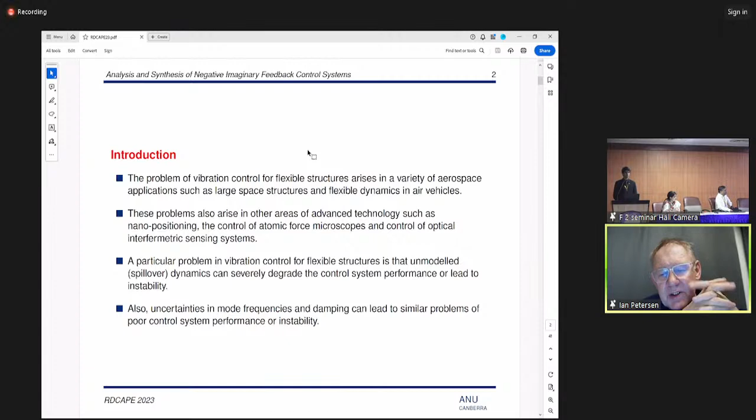This is an area of research I've been doing for quite a long time, and the motivation for it is the vibration control in flexible structures, such as might arise in a variety of aerospace applications, such as large space structures, flexible dynamics in air vehicles, also in nanotechnology applications, such as in nanopositioning, control of atomic force microscopes, and control of optical interferometric sensing systems.

So the particular problem that occurs in such vibration control problems for flexible structures is that there may be unmodeled dynamics, which are often called spillover dynamics, which may severely degrade the control system performance or even lead to instability. Also, there may be significant uncertainties in things like the mode frequencies and damping that can also lead to similar problems in control system performance.

So here's one of the motivating examples, the atomic force microscope, which operates at a microscale and has a flexible structure consisting of a cantilever as well as a piezoelectric tube actuator, which does the actuation and sensing in this device.

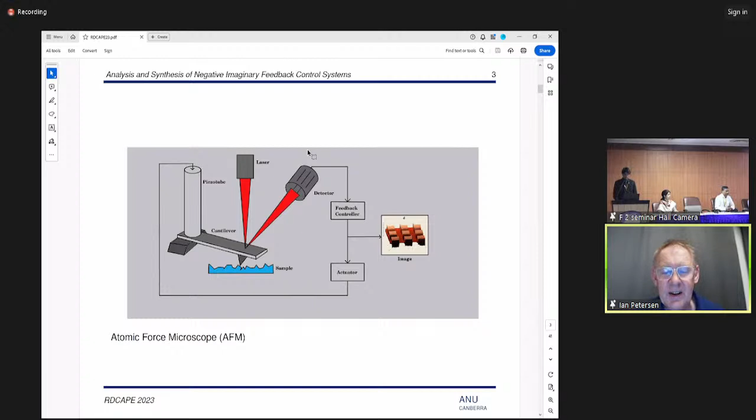So the idea of this negative imaginary systems theory is that it aims to provide a general systems theory framework for robust control of such flexible structures. It allows for the design of controllers to increase the damping of the modes of a flexible structure. The controllers are also robust against uncertainty in modal frequencies as well as unmodeled spillover dynamics. Also, it is useful in control of flexible structures involving the use of piezoelectric actuators and sensors.

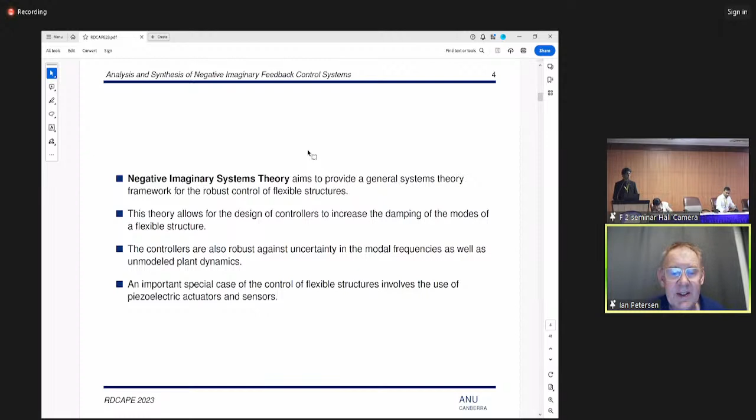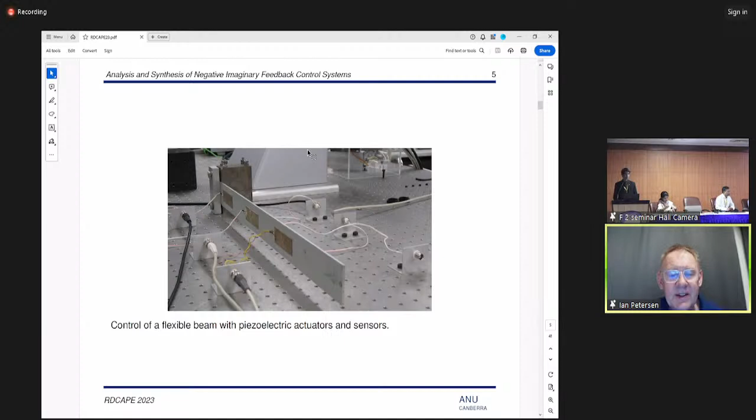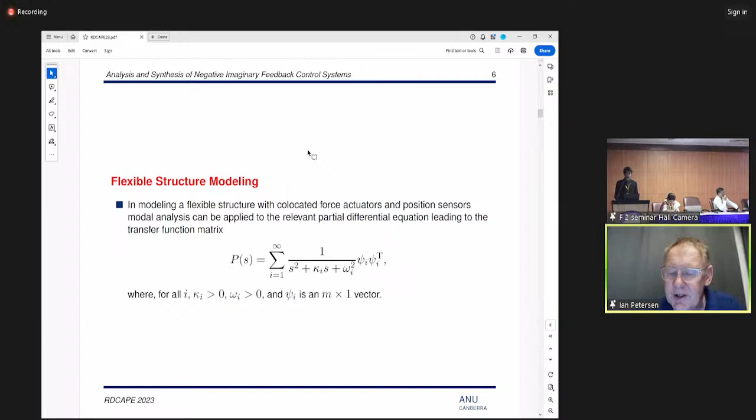If we take the Hermitian imaginary part of such a transfer function matrix, we get a quantity that is negative semi-definite for all frequencies. In the scalar case, with a single input, single output flexible structure, that just means the imaginary part is negative over all frequencies. Because of that, we call such a transfer function negative imaginary. It turns out that any flexible structure with co-located force actuators and position sensors will have this negative imaginary property for its transfer function matrix.

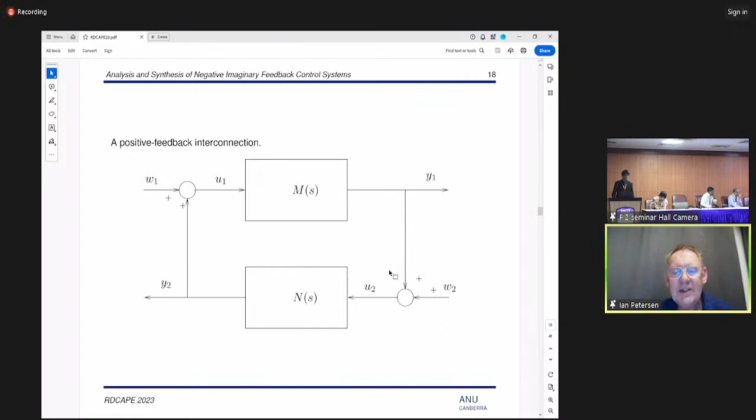So the proof of that theorem, the negative imaginary theorem, involves using that negative imaginary lemma to construct a Lyapunov function for the closed-loop system. We won't go into the details of that here, but instead we'll look at how we could have a simple proof in the single input, single output case based on the Nyquist criterion.

This gives us a simple interpretation about why this theorem holds. Because we're using positive feedback, when we use the Nyquist criterion, the critical point that we look at is the point 1 plus j0. We know that negative imaginary systems have a phase lag between 0 and 180 degrees, and an SNI system will have a phase lag which is strictly in that interval. That means that when we form the cascade of the NI system and the SNI system, the corresponding loop gain transfer function will have a phase lag which is in the strict interval between 0 and 360 degrees. So what that means is the Nyquist plot excludes the positive real axis for positive frequencies.

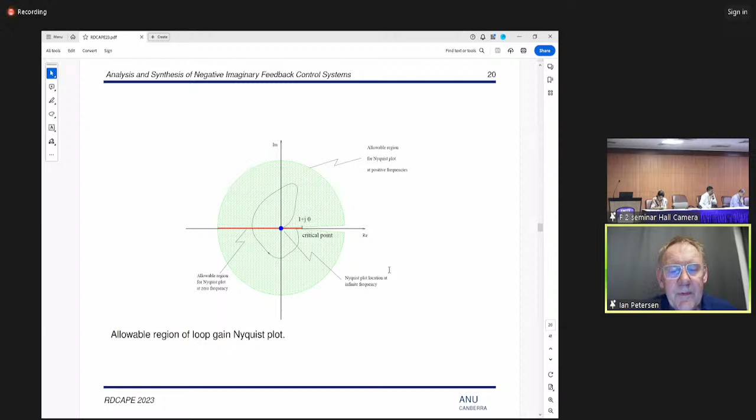So formally, this result generalizes to the multi-input, multi-output case, when we've got an NI transfer function matrix and an SNI transfer function matrix. We've got this assumption that at infinite frequency, the loop gain is 0, and then the result is that the positive feedback interconnection we've been looking at will be stable if and only if the maximum eigenvalue - because now this is a matrix - of the loop gain at 0 frequency is strictly less than 1. In the general case, the proof uses the negative imaginary lemma, and in the special case, the single input, single output case, those Nyquist arguments I just gave give you the result.

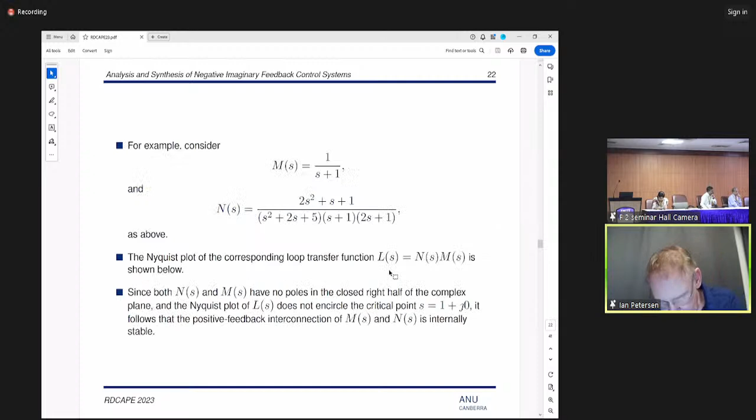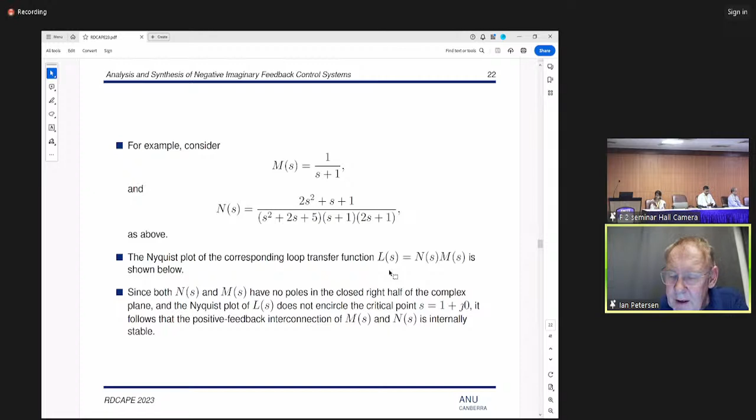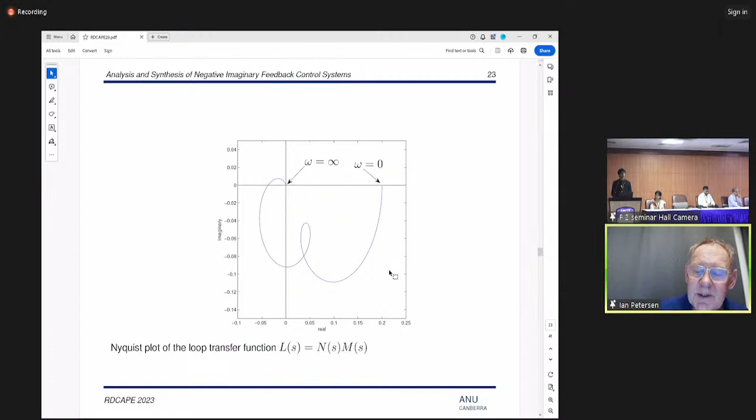So let's look at an example of this. Suppose we've got the same transfer function as before as N of S, and we've got M of S as just a first order lag, and we look at the Nyquist plot of the corresponding loop gain transfer function, the product of these two transfer functions. We can see that now the only time the phase is 0 is at 0 frequency and infinite frequency, and also the DC gain is strictly less than 1, so we guarantee closed loop stability.

What I want to move on to now is looking at some ideas about how we might synthesize controllers using this negative imaginary systems theory. The idea we'll look at is to construct a state feedback controller in order to try and make a system negative imaginary. The first approach we'll look at is an LMI approach.

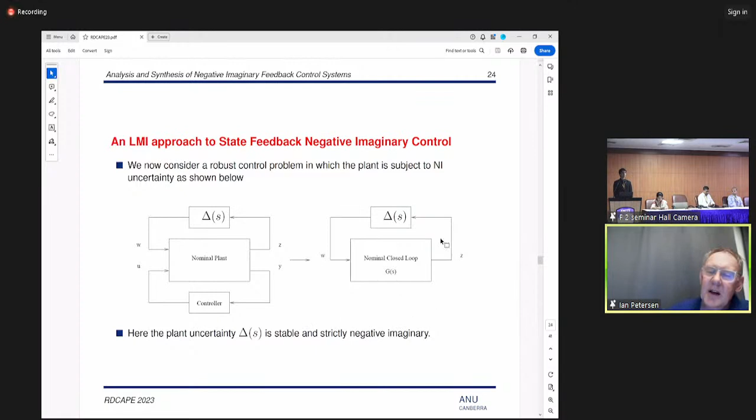So the idea is that we might have some nominal plant which is not negative imaginary. It's connected to some uncertainty delta of S, which is negative imaginary, representing, say, the transfer function of a flexible structure. Then we want to apply state feedback to that nominal plant in order to make the nominal closed loop transfer function negative imaginary, and then provided the uncertainty is stable and strictly negative imaginary, we can guarantee closed loop stability.

So here we're assuming we've got full state feedback, and that enables us to get a quite straightforward solution using LMIs. If we don't have full state feedback, if we have output feedback, it is possible to solve this problem, but things become more complicated, so we won't go into that.

Okay, so this is our nominal plant. It's got an uncertainty input, uncertainty delta enters in this channel corresponding to matrix B1. We've got our control enters into the system via the matrix B2, and the input to the uncertainty comes from this output Z1.

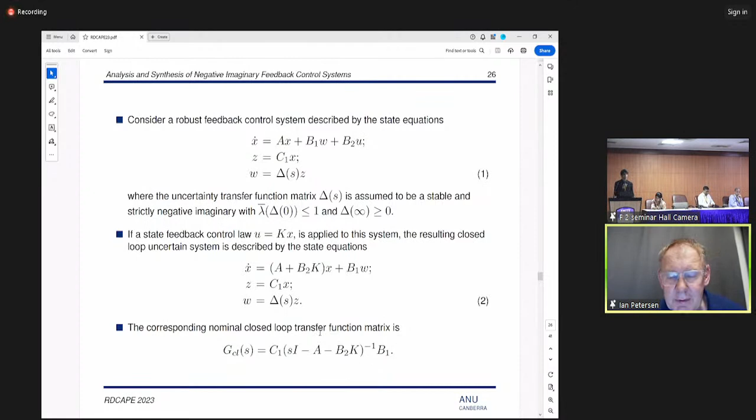So the idea is we want to find a state feedback control, U equals Kx, to try and make the closed loop system negative imaginary. So we've got this corresponding closed loop transfer function. We want that to be negative imaginary.

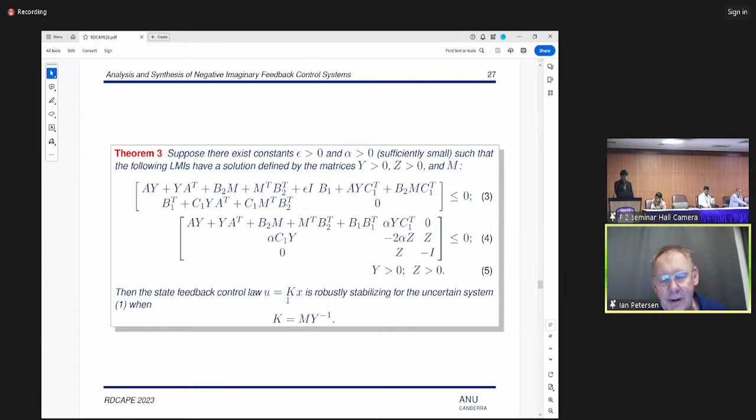And in this LMI solution, we get a sufficient condition in terms of these LMIs and the corresponding solutions. If we can find parameters epsilon and alpha sufficiently small such that these LMIs have a solution, then from those solutions we can construct the corresponding controller which robustly stabilizes our uncertain system.

So to illustrate this, let's look at an example. Here's our nominal system. It's made up of various components. They might correspond to, say, actuators and sensor electronics, which we have some model for. But included in this is a flexible structure, which we haven't got an exact model for, but we know has co-located force actuators and position sensors, and so therefore would be negative imaginary, or strictly negative imaginary.

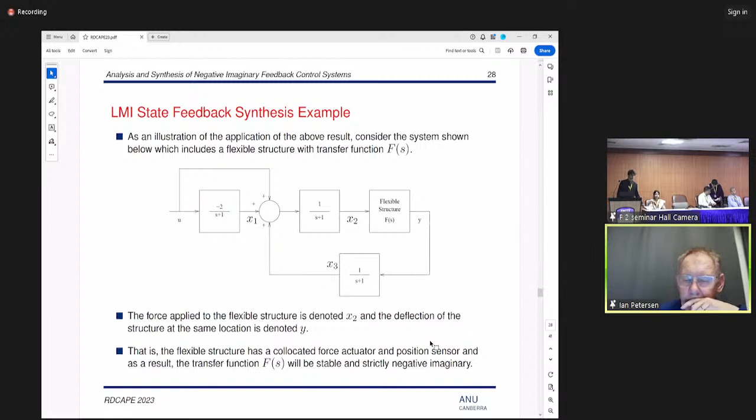So the force applied to the structure is labelled X2, and the deflection of the structure is labelled Y. So we want to construct a state feedback controller, as we said before, and we'll replace the transfer function f of s by a constant gain of 1, and this uncertain transfer function delta of s, which will also be

strictly negative imaginary. So essentially what we're assuming here is we're looking at the case when the flexible structure is not flexible, it just has a gain of 1, and then all of the flexibility is assumed to be uncertainty and incorporated in the transfer function delta of s.

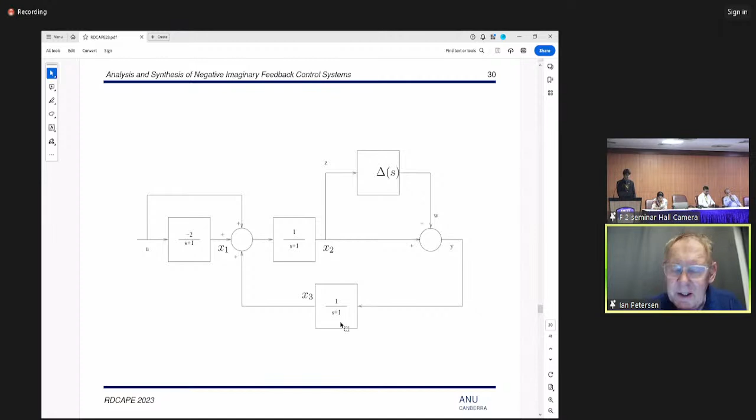So rewriting our block diagram, we'd have the following situation, and then we want to apply state feedback to the nominal system here to guarantee robust stability in the face of this flexible uncertainty.

So the first thing we do is a state space model of the nominal system, which we get like this, and then we've got the A, B1, B2, and C matrices in our standard approach. We have to choose some parameters as small values. We'll just choose those in this way.

Then we apply the MATLAB LMI toolbox to solve the corresponding LMIs, and then we sub that in to find the corresponding state feedback controller, and then according to the theory, that closed loop transfer function should be

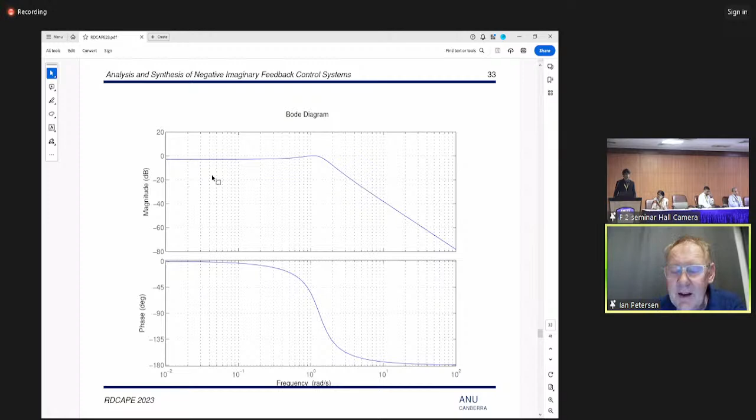negative imaginary. So we can verify that again by doing a Bode plot of that closed loop transfer function, and what we see is that the phase of the Bode plot is between 0 and -180 degrees. So we've got the negative imaginary property, and also notice the DC gain is a bit less than 0 dB, and so that's also going to enable us to guarantee the DC gain property.

So we've got that phase property, DC gain is less than unity, so provided our uncertainty transfer function also has a DC gain strictly less than 1, then the negative imaginary theorem will enable us to guarantee robust stability.

So I'll just finish up with another method of solving the same problem. And this method uses, again, we're solving the state feedback NI problem, but this time, rather than using an LMI, we're going to use a method which involves solving Lyapunov equations, which might be quite a bit easier numerically than the LMI method. So we've got a similar setup with a nominal system.

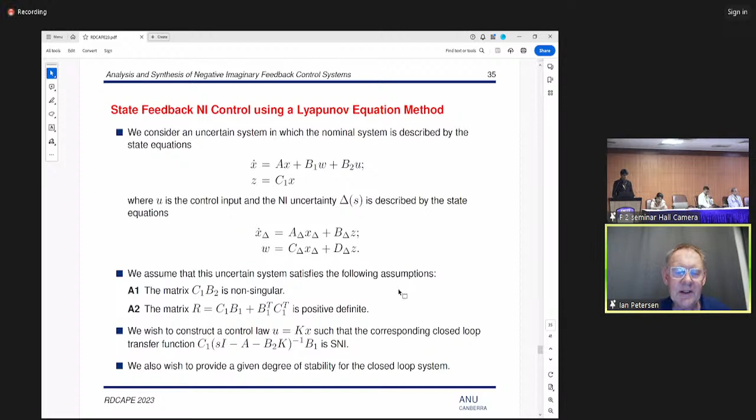We've got some uncertainty. So one drawback of this method is that we need the nominal system to satisfy some extra assumptions so that we can solve it in terms of this Lyapunov equation method. And these assumptions essentially amount to a requirement that the nominal system is relative degree 1. So normally negative imaginary systems can be relative degree 1 or relative degree 2, but in this method we're only allowing relative degree 1.

An advantage of this method, apart from the numerical advantage, is that we can not only stabilize the system but also give a guaranteed degree of nominal stability for the closed-loop system. So the idea is we first specify a parameter epsilon, which specifies how much nominal stability we want, where the poles of the nominal system are going to be, and how much we damp our resonant modes.

Then we apply a Schur decomposition to this transfer function, which gives us a decomposition like this. This essentially decomposes the zeros of our system into unstable and stable zeros, and we only worry about the unstable zeros. We also do a corresponding transformation to the rest of the system. The result is that we solve a pair of Lyapunov equations which only relate to these unstable systems, so the subsystem corresponds to the unstable zeros.

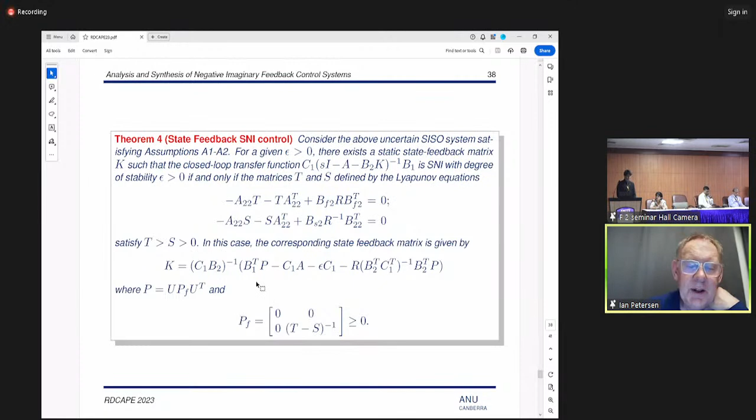We solve these two Lyapunov equations, and provided the difference between the solutions, t minus s, is strictly greater than zero, positive, we can solve the corresponding problem. This is the formula we have for the state feedback gain matrix, and it turns out that this matrix PF is going to be the matrix that occurs in the negative imaginary lemma.

So this method is actually a necessary and sufficient condition, provided we satisfy the initial assumptions. It also allows for a degree of stability to be specified. It has the advantage, but also the disadvantage, that we require these extra assumptions, which restrict us to relative degree 1 systems.

Okay, so that's all that I want to say today.

In conclusion, we've considered a class of systems termed negative imaginary, or NI, systems. We've shown that the consideration of these systems leads us to some robust stability analysis results about the feedback interconnection between NI systems and strictly NI systems relating to the DC loop gain. We've shown that this can provide analysis of robust stability of lightly damped flexible structures.

And it also captures some of the early, more practical approaches that were used by engineers in the 80s in solving these problems. It's quite similar and complementary to the passivity approaches.

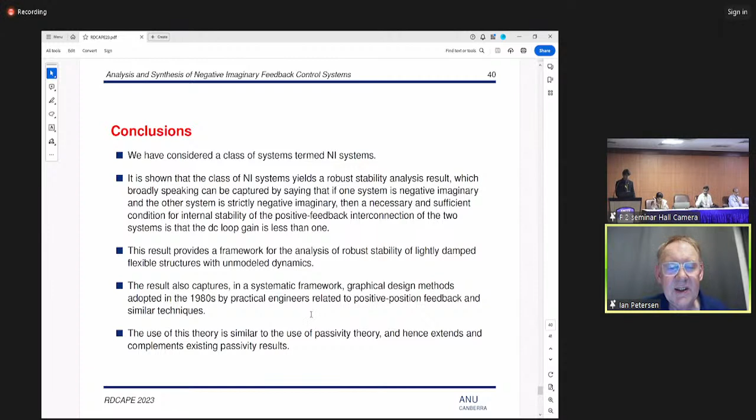We've also considered the state feedback synthesis results, which, if we've got state feedback, enable us to systematically design controllers that can exploit this theorem. We've got two methods: the LMI method, which is very general but only a sufficient condition, and may involve difficult LMIs to solve for high order models. The second method involves Lyapunov equations, which may be easier to solve, but it requires this assumption that restricts to relative degree 1 systems.

Okay, so I think that's all that I've got to say. I'll stop there and ask if there are any questions.

Okay, so thank you, Dr. Petersen, for your very informative talk. I'm Dr. Tiwari, with whom you were in contact over the last one and a half months, from India, right? So it was. Yes, nice to talk to you.

Yes, so this was a very informative talk, and one of the questions that comes to my mind is that there is a requirement of a perfectly square matrix for applying this negative imaginary feedback system.

Is it compulsory that if we don't have a perfectly square matrix, then can we not go for this application? I guess the original motivation came from the fact that we have the requirement of co-located sensors and actuators, so you might think, well, if we have more sensors than what we need for co-located sensors and actuators, maybe it should still work. I think some researchers have been looking at this. If you've got more sensors, maybe you can apply some kind of scaling of those sensor outputs to reduce the number of measurements to equal the number of actuators, in such a way that you guarantee the negative imaginary property. So that's one way people have looked at doing it: if you have more sensors, you'd think that would be a good thing, and then you work out how to combine those sensor outputs in such a way to make the overall system square and negative imaginary.

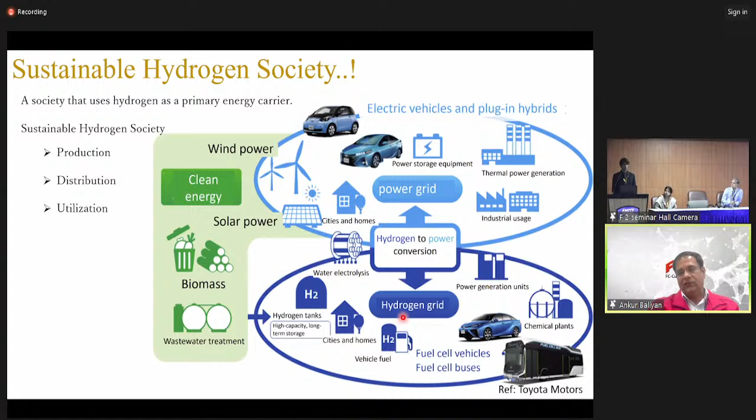So we generate clean energy, transport that hydrogen, and hydrogen can be used in various ways. Of course you can power your car, buses, and transportation. But you can also transfer that hydrogen to the power grid, and the hydrogen and EV combination is starting to dominate.

That means almost 60% is not from passenger cars, but from light vehicles such as small pickup trucks or heavy duty trucks. So 50% of passenger cars may possibly be converted to electric vehicles, but 60% of the market in the future is likely to be dominated by fuel cells.

Coming to the global commercial vehicle market, many hypes are out there, but almost 80% of this market is still powered by diesel engines. If you look at the fuel type, many people believe there have been radical changes toward EVs, but only about 3-5% of present vehicles are EVs. So we still have a long way to go before we reach a sustainable society.

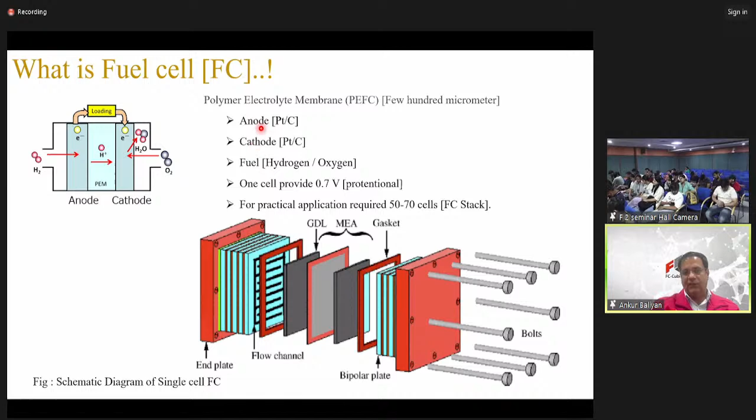As I told you, since the anode has nothing much, of course you can improve it, but you can see the weightage in terms of cathode and anode here, the reaction pathways, this is the most important. Many things are happening in the cathode, so people would like to explore cathode rather than invest more time in anode. Of course, one can investigate and spend their time on anodes as well.

Looking at the key research areas, one is the catalyst. We would like to do catalyst development, which is particularly for the cathode only. People are looking at innovative fuel cell design - can you improve this fuel cell so the weight reduces and it gives more energy density? People are also looking at the membrane electrode assembly, which I'll explain in the next slide. So these three are the main key areas that people are focusing on.

A good thing about the fuel cell is that since platinum is the only catalyst we are using, the geopolitical significance is it doesn't have much exposure to country-specific restrictions, unlike EVs. If you look at EVs, lithium reserves are mainly controlled by China, or cobalt reserves and so forth. So I don't know how far EVs can be sustainable if this geopolitical scenario continues.

What is essential for the fuel cell is we need to find out, because many reactions are happening, we wanted to explore the reaction pathways. I would take some time to explain this system, which is essential.

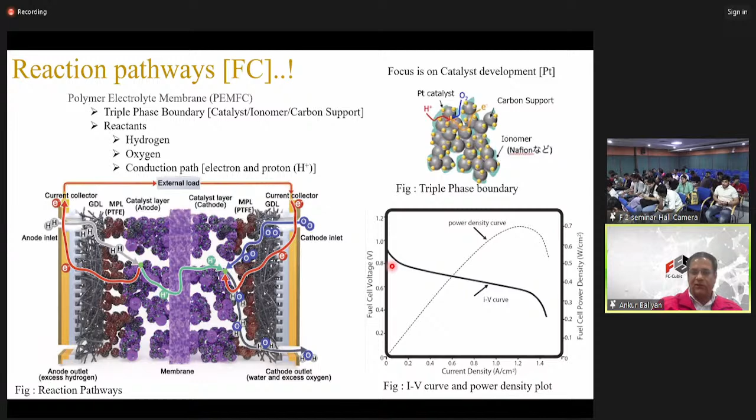How possible is it for us to have this slope not like this, but like if it became something like this. So if it became extremely flat, that means instead of 0.7 average, it's going to be around 0.8, which will almost increase the power density by twice in the same space of fuel cell.

So many people, since I already said the catalyst is the most essential part of the fuel cell system, many people are working on this to understand how the catalytic mechanism takes place. So to understand the catalytic mechanism, we need instrumentation or characterization.

So one is called unimodal characterization. Unimodal characterization means you do one kind of characterization, and you try to come up with some hypothesis that okay, this is what is happening. But very recently, people are doing the multimodal approach, where you have multiple instruments, and the knowledge coming from all those instruments gives some meaningful, much better approximation than the unimodal. So that's called multimodal or integrated analysis.

Since you already saw the fuel cell, the active component in fuel cell, you have the catalyst, and catalyst is made of atoms, and atoms are again arranged in unit cells. In terms of material, it has proton, and of course it has the electron, or its distribution.

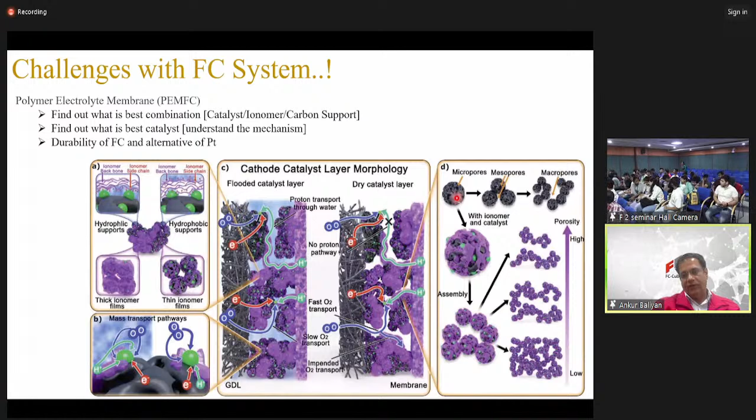And since this catalyst is basically in close proximity to this carbon support, we need to think of this also. So this can be a few micrometers, a few tens of micrometers, basically.

So the interaction length goes from atomic to micro level, or sometimes to meso scale. That means a single modal approach is not enough. We should include a very good picture, and we have to have this whole regime included into our characterization.

So essentially, remember this: what kind of characterization do we need? We need characterization which can tell us the particle sizes, and of course their interaction scale and various kinds of properties. So we need to investigate this kind of sample with some characterizations. I'll skip this for the moment, but I think it's good to go.

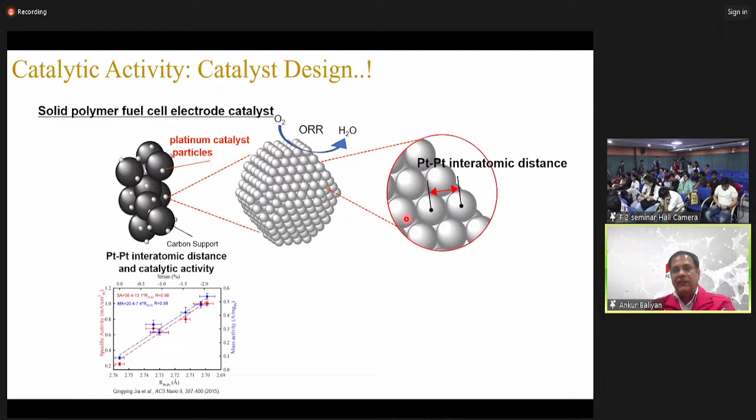That means we need to find a way so that we can know the interatomic distances and the crystal structure. At the same time, we need something to tell us the particle size, and of course how the alloy influences its surroundings.

To do so, most people use instruments in their lab, but frankly speaking, those instruments are like a toy, because the energy they generate is not enough to probe individual atoms or individual crystals. So you can use them for screening purposes, but if you really want to understand some mechanism meaningfully, you have to use some kind of synchrotron radiation.

For those who do not know about synchrotron centers: it's like a very large ring of an accelerator. Here, we launch an electron, and using magnets we accelerate the electron so that its speed gradually approaches the speed of light. Once that electron beam passes through the magnets, which we call undulators, the electron starts to radiate energy.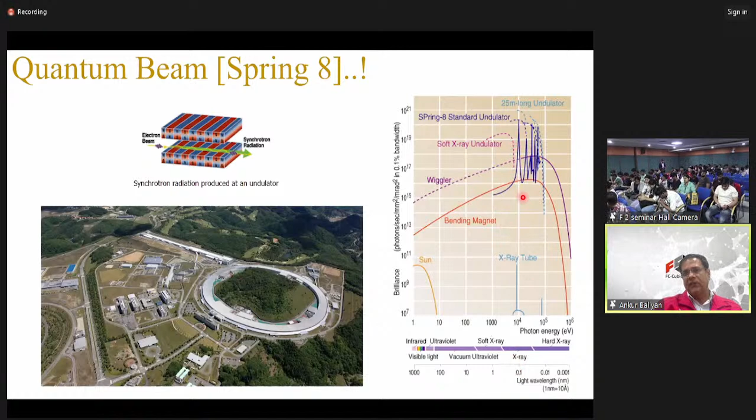And that energy, you can see on your right hand side, is X-ray. You can generate soft X-ray, or you can generate hard X-ray, and so forth. The energy of those is really intense, in terms of the brilliance, if you measure it.

In Japan, we have various synchrotron centers, but a very famous one is SPring-8, with whom we are working at the moment. You can see there are almost 40 beamlines. A beamline is like one kind of characterization that you can do - you can do diffraction characterization, spectroscopic characterization, or imaging characterization, depending on which beamline you use.

So to understand something in terms of mechanism and to see the reaction pathways, we have to have cutting edge characterization or instrumentation. We call it integrated analysis. This is where the scope for students probably is, because this kind of instrumentation does not exist, and sometimes you need to modify it, you need to redesign it. There are very highly paid professionals who do that.

In quantum beam analysis, we do 2 different kinds of characterization: one is called spectroscopic, and another is imaging characterization. Here I'll be talking about 6 different kinds of characterization - 5 primarily. So we have the XRD, which is to know basically the crystal structure.

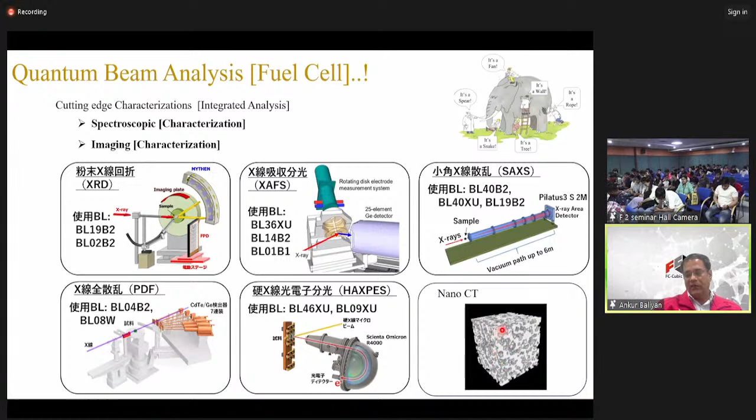kind of crystal or any kind of systematic arrangement we have. And this is HAXPES, which is basically to know the valence band probing, or the kinetic or binding energy probe. And of course in terms of imaging, we have the nano-CT, where you can scale, you can slice basically the electrode, and then you can see the distribution of water, or the distribution of catalyst, or the carbon or ionomer and so forth.

So I summarize everything here. We have different options, but this is primarily for the lattice constants, of course. Other information has been given below, but because of the time constraint, you can see that we can probe basically the lattice constant with XRD.

And we have the XAFS. We can probe basically the alloying degree, that means we can probe the local structure. And this PDF basically is a counterpart of XAFS, because this can only probe up to 5 nanometer, but this can probe beyond 5 nanometer, like 10 nanometer or 20 nanometers. So that means it can locally analyze, but it can really do much more at the tens of nanometer scale.

Then you have the SOCs, which is for the self-assembly kind of structure, we can probe the particle size as well. And then we have this HAXPES to probe basically the electronic state, like the band gap and stuff, if they're contributing, because the D band here contributes a lot in terms of the particle catalyzing activities.

Of course, we should also talk about the imaging. There are different kinds of imaging you can do. You can do STEM imaging using the TEM, or you can have the SEM also to know the 3D structure. But here at the moment, we are looking at the STEM images.

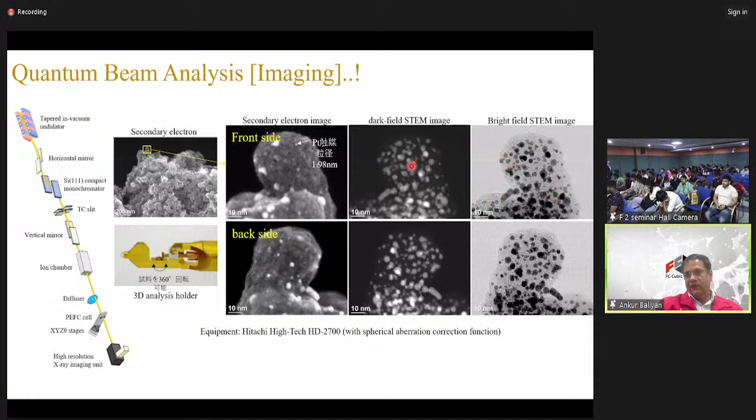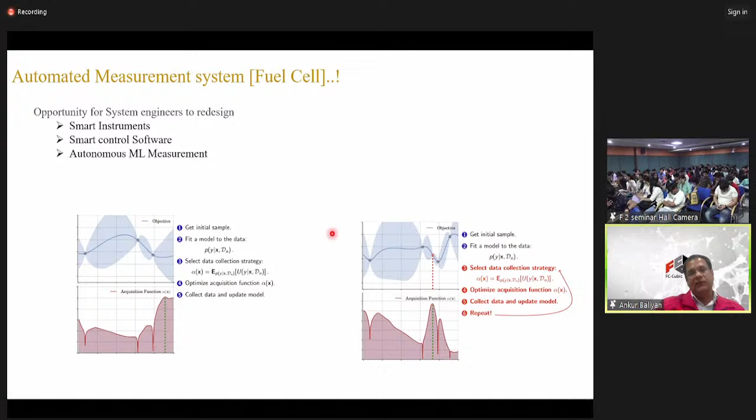And that says, this is the highest point, my confidence at this particular point is low. If you measure at this point, my confidence will improve. This curve slowly - meaning the black box - starts to take the shape of the objective function, and so forth. This is called an autonomous measurement system. This is the future, where people are working.

Since we have the measurement system, we also need an analytical system. So you have to have a database, because we're not going to do unimodal analysis - we're going to do multimodal analysis. At the same time, as this data comes in, you need domain knowledge experts - people who are good in, let's say, fuel cells. They will create a dictionary, and based on the dictionary and the data, we design an application so that analysis can happen autonomously. After the analysis, the report can be shared, or the model made during machine learning can be shared with colleagues, so efforts can be minimized.

So what we are doing at the moment is called integrated analysis. You have the energy source - earlier this instrument was on a different beamline, but now we are making a new beamline where all this characterization related to the fuel cell can happen simultaneously. That means you don't need to move the sample.

Earlier when you measure, the sample position is the same, but when you measure from another beamline, the sample position shifted. So the sample is the same, but you have missed the position. The spatial information is lost.

However, with integrated analysis, you need a system engineer to design all this together because it's technically challenging. So from the data you collect, you put the dataset together and send it to the machine learning model, you train a model, and for that you need a workstation with GPUs computationally enough to take lots of data. Then you can visualize that data or share the model on the cloud for further analysis, to autonomously analyze it.

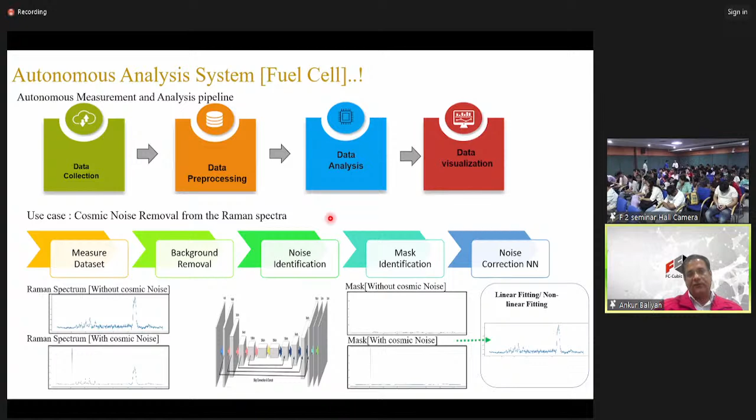But at the moment, we are measuring the data and simultaneously correcting it, doing the background and noise correction in real time. Maybe if you have even 1 million spectra, it will hardly take 2-3 minutes to remove that noise. So this is the kind of use case I wanted to introduce.

So I come to the conclusion: development of the next generation fuel cell ecosystem requires the following things. One, you need to find the bottleneck in the system - the bottleneck of each individual system - and fix that, meaning digitize that system. Focus on high throughput experimentation.

Then we need to design and develop cutting edge instruments and AI-enabled data acquisition techniques. Of course, autonomous characterization and AI-powered measurement analysis. And it requires capital investment for human resources, computing infrastructure, advanced instrumentation, and AI.

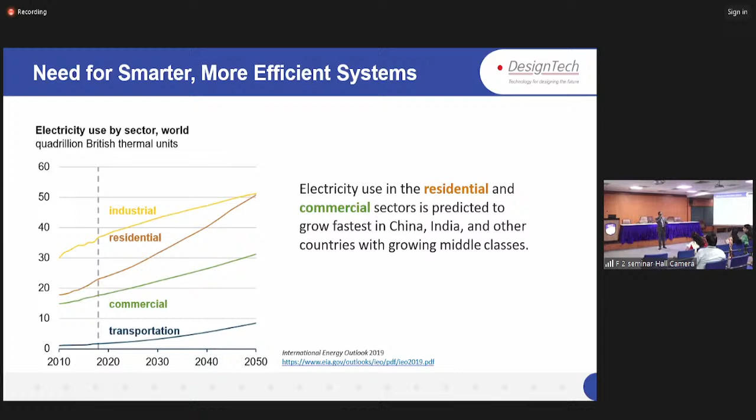Now, next we are going to talk about what challenges industry is facing. When we say electrification, these are the key technologies which are currently in use: first is battery, power electronics, and motor control. We have discussed this earlier also, that these things are available everywhere, and everything will be controlled by these things.

Now, these are the key technologies, but what are the challenges?

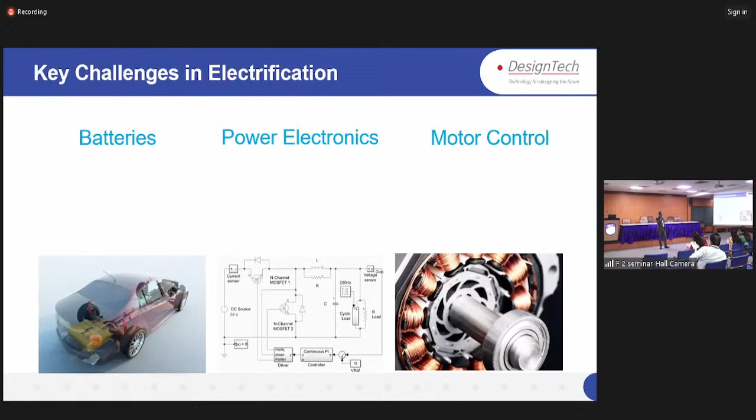When we say challenges, things like battery modeling or safe operation, whether the battery is working safe or not, and aging of the battery. We all use smartphones, and our smartphones' battery life degrades day to day. So we need to work on that too, to get some kind of optimized solution so it can work more efficiently.

For that, what we require is BMS system development, battery management system.

Next, for power electronics, we definitely require some kind of dynamic solution. A digital control needs to be designed, a supervisory logic needs to be designed, and when working on this, we need rapid prototyping. So whatever we have developed on a motor or a system, we need to prototype it on an ECU so that it can control that motor itself.

In motor control, we definitely require sensor calibration, parameter estimation, efficient algorithms, and control tuning. The last two are the most usable things in motor control: parameter estimation, meaning what parameters we set for a motor so it can work efficiently, and how we auto-tune the controller we are designing. These are the major challenges industry is facing.

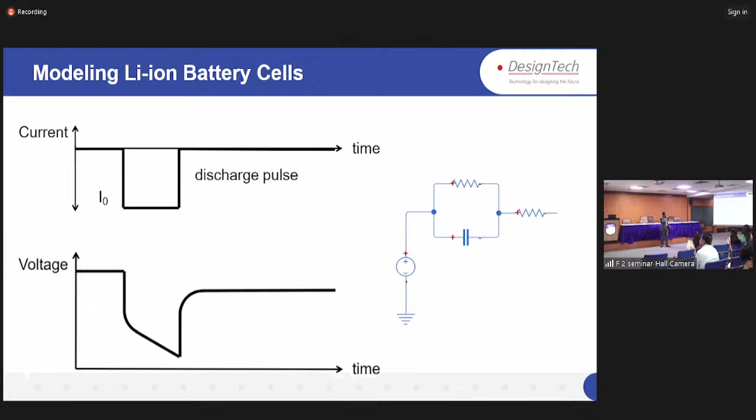When we say we are going to model lithium ion battery cells, the first thing that comes up is how it is going to charge and discharge. A typical current and voltage graph of a lithium ion battery is displayed here, showing how your electronic circuitry will be displayed, whether building on hardware or software. When we say how it is charging and discharging, it has a series resistance which works on the instantaneous response, then a parallel resistance and capacitance which works for exponential relaxation, and in the end a voltage power source is required which works for open circuit potentials.

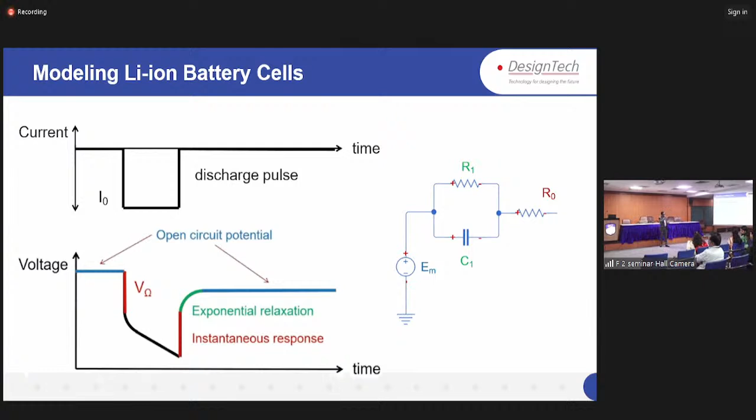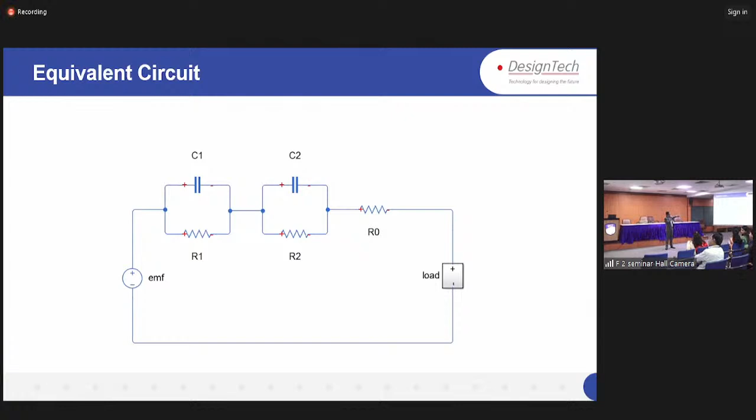So how are we going to use MATLAB for this? This is my circuitry. It looks like this - we have used some resistance, capacitance, a load, and a power source. So how do we build this in Simulink?

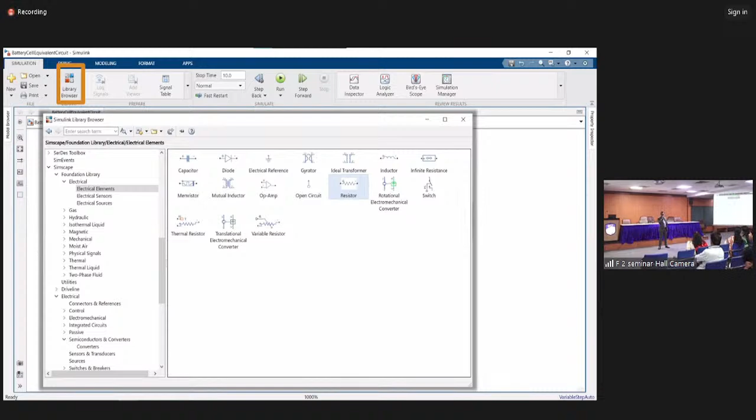Simulink is a platform for model-based design environment where we have a proper library available for different components. You can use these components, which could be electronic components, active or passive, or single phase or three phase components available for electrical modeling. By using these kinds of libraries, we can build up such kind of model.

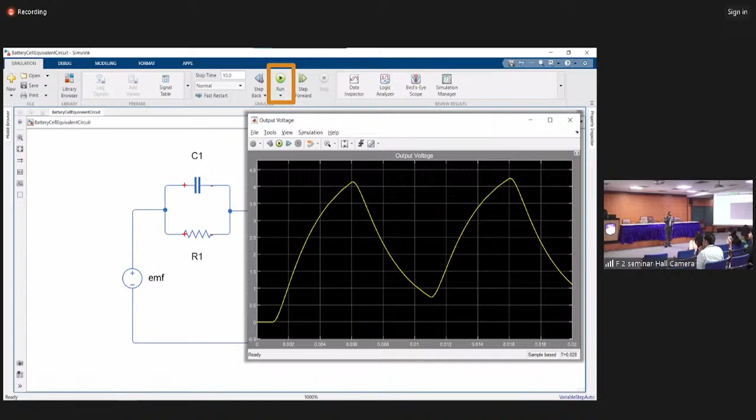So when we build up those things, what we could do is simply run the model and see what kind of responses are coming from that circuitry. This is a quite simple one, where we have some components available, and we can use these components to develop such kind of things.

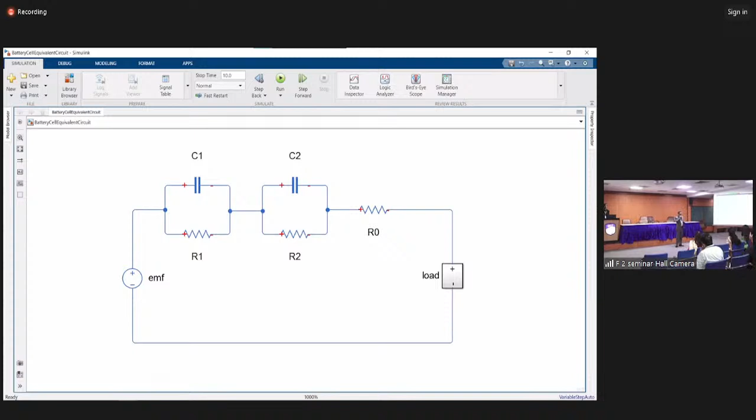But we are discussing about a battery management system as a complete solution. So what we could do is use a complete lithium-ion battery system to build up such kind of models. We have products available as Simscape Battery, which will allow you to design a complete battery pack, which you can first simulate and then later on use their parameters for actual systems.

Now how are those parameters going to be identified? So here you see that I have run that particular model, and in that model, when we zoom in on the bottom one, the battery voltage, there are definitely some differences between the actual and the simulated results. So we need to parameterize our model so that we can get a very minimum error and a better battery that works according to our need.

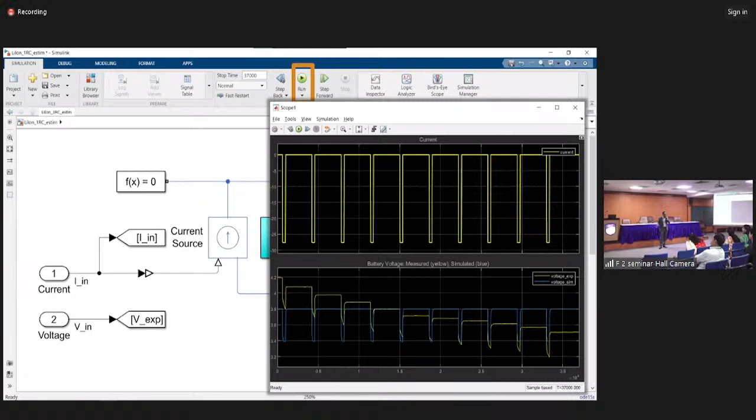So for that, we have these kind of parameters available, which can be used for state of charge or temperature of the battery, so that we can fix up these parameters. And with these parameters, we can easily get the desired results.

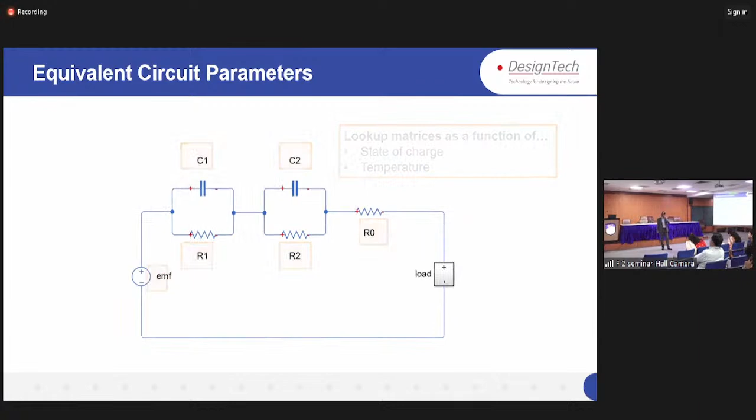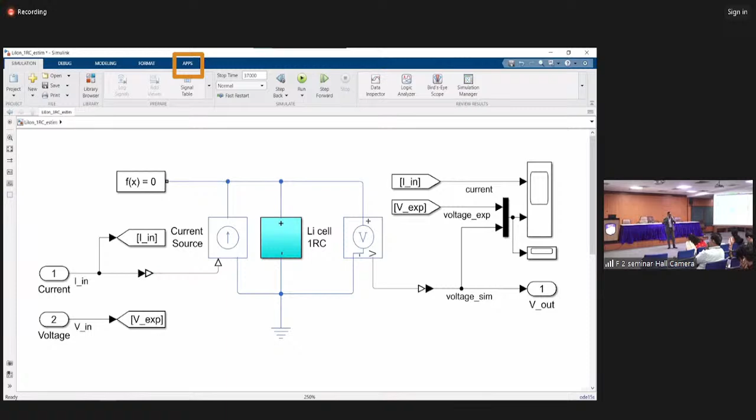So what we are going to do is again use one of the apps available. These apps are ready things which will allow you to perform different operations on your model. So what I need to do is parameterize or estimate parameters for my model. I can simply go into the app section where a variety of different apps are available, and in these apps, I can simply choose the parameter estimator.

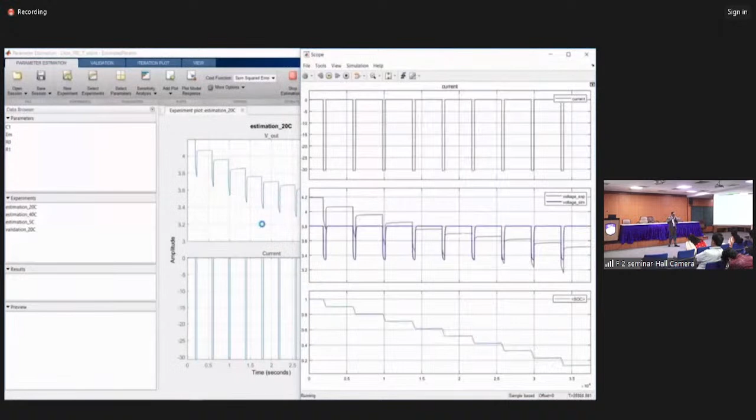In this parameter estimator, we have options available to define multiple sets of data for those variables which I need to parameterize. And whenever we feel that the error is very minimum, that is the actual parameter which is required to be put into that particular component.

So you see it has run multiple iterations, and on the left hand side of the screen, the estimated parameters have been shown, giving me that kind of results also. So we have complete estimated parameters available, and now we can use these variables within our complete model.

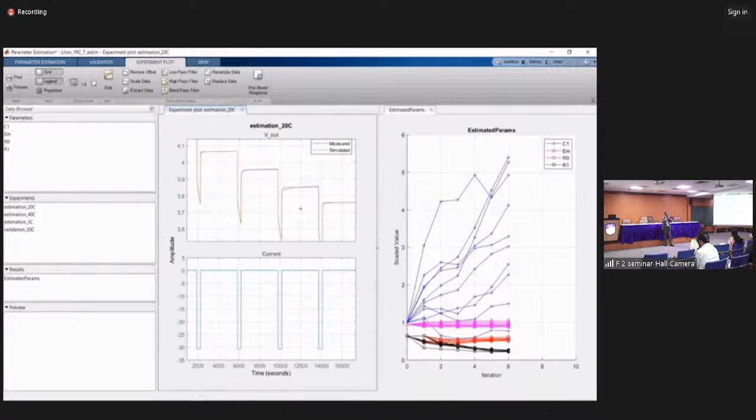Next, that model is just for a single cell. When we have multiple cells available, like in this case where we have three battery cells, how can we operate the charging and discharging states? So definitely what we need is some kind of supervisory logic.

MATLAB and Simulink provide an option known as Stateflow. Stateflow will allow you to define a complete logic. Here in the middle, you are able to see there are some logics which will show. So when I further execute this, it will show you how a specific cell is going to charge and discharge, and it will show all the states to you.

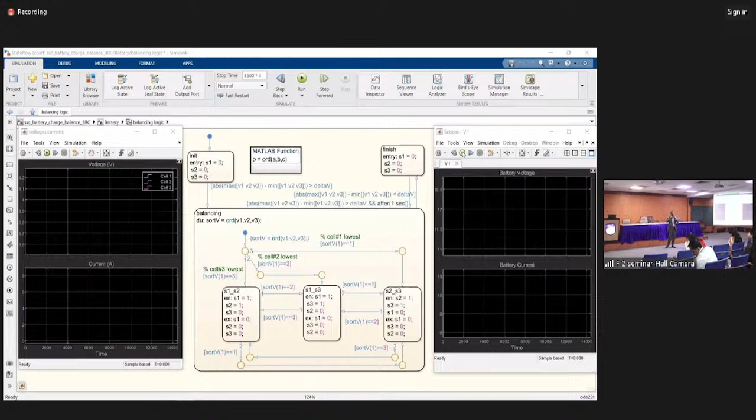And corresponding to that, the graphs are there. You see it is highlighting the cell balancing, and which particular cell is charging and discharging accordingly, it is showing me that. So if we want to define such kind of supervisory logic, we can easily define it within MATLAB and Simulink by using Stateflow.

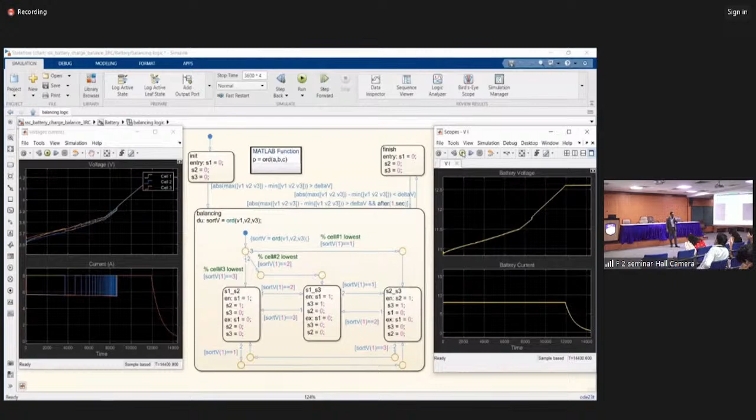So we have started from a single cell, then multiple cells, or better I can say multiple lithium-ion batteries. Now we need to incorporate this into a complete system. And initially I said that we need to tune a controller, we need to rapid prototype those things. So how can we do such kind of things?

Here, a complete electrical system has been defined in this place, as well as a complete controller also has been defined in this system. So we have a complete vehicle dynamics model, and our engine system is there. These blocks are readily available within the Simulink library under Simscape physical modeling tools. So we can use these blocks and define their parameters, and definitely parameter estimation will work in these kinds of cases also.

So right now it's a hybrid kind of vehicle. We can choose out completely electrical motors also, so we have options available for EV, HEV, both kinds of things. In engine, different options are available, so we can choose accordingly.

So what we have is this controller. Now this controller is perfectly working on my system simulation, but I want to make sure that this particular controller will work on an ECU also. So either I should go and write a complete code for this controller and burn it out on a specific controller so that it can work accordingly, or I have a better option.

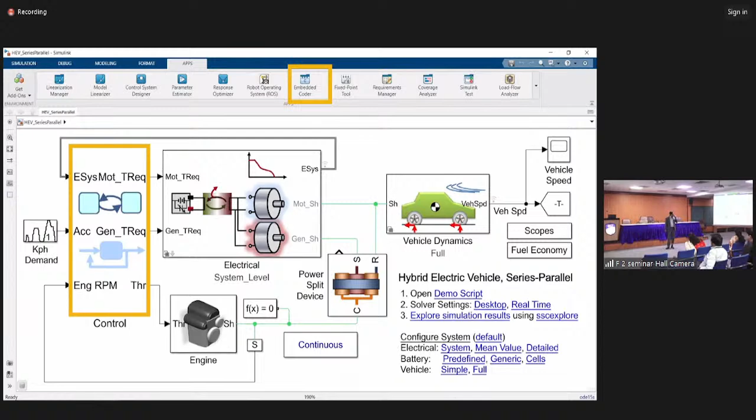In apps, what I have is an embedded coder kind of product. Embedded coder will allow you to automatically generate C or C++ embeddable code for a specific device. We support a variety of different devices, microcontrollers, processors. So you can simply burn your code onto those processors or microcontrollers to check whether it's working perfectly on them or not. We support SIL, PIL, HIL kind of things, so you can simply use that as well.

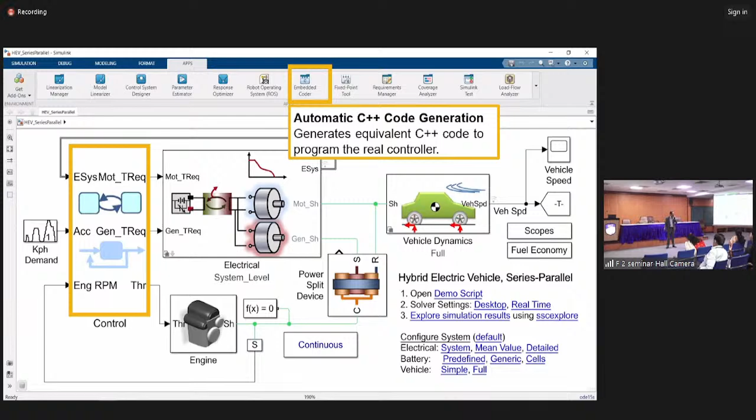So this complete approach is known as model-based design, from concept to code. First, we started from modeling our system and simulating it. If we go back and see our RLC circuitry, the RC circuitry basically, we designed a model, ran that simulation, and first for a single cell, then for multiple cells, and then for a complete system. When we are happy with that system, what could we do?

Let's say, test early and often. So we can test our models in each and every step to see what kind of results are there. If we are not satisfied with the result, we can go back and change parameters, change motors, or change the complete system also. As well as that, as I said, automatically generate the code, so you can generate automatic code also for that.

So why is it needed? Why is model-based design needed? How many of you agree that nowadays products come very early in the market? Every 6 months a new product is there, or less than that, right? The reason is that people, not only in MATLAB, are using this approach on different software. The software could be anything. So what they are doing is using these kinds of software to kill the competition in the market. Whoever is early in the market will stay in the market, right?

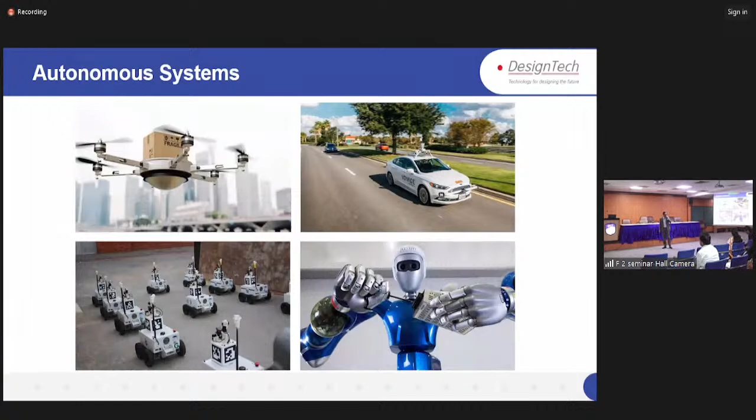So again, we are going to talk on three things: why is it happening now, what challenges the industry is facing, and how are engineers overcoming them. So first thing first, why is it happening now.

So, is this thing not available earlier? When we graduated, was this not available? Or when sir graduated, was this not available? Okay, that's fine, I partially agree with you.

The reason being, whatever is used in artificial intelligence is core mathematics, statistical analysis, right? But the thing is that at that moment, we don't have enough data available, right? People used to store data on papers, right? People didn't have enough computing power, right? What we have nowadays, right? So yeah, please.

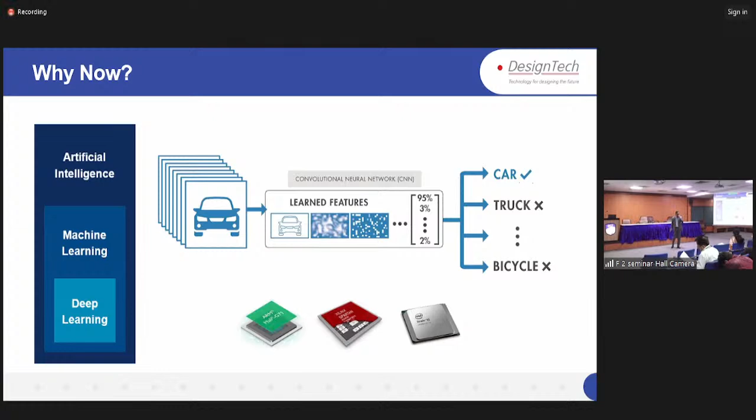And definitely, as I said, we have enough computing power. If I want to run a deep learning model on a CPU device, it takes days or ages kind of time. So we require a GPU computing device, or overall, maybe some kind of machine which will perform high performance computation on CPU or GPU. It totally depends on what our need is.

So next thing, what challenges industry is facing. I'm going to talk on AI workflow, how AI will work. First thing, data preparation. We have enough amount of data, but whether that data is usable by our requirements or not. So we need to first prepare our data, then modeling, AI modeling, simulation and test, and finally the deployment section will come up.

Again, some challenges are there. Everything will come up with some kind of challenges, and we as engineers are going to tackle those challenges to enhance the things. So in data preparation, AI modeling, simulation and testing, and deployment, at everywhere some kind of challenges are available.

Like, the data might have some jitters in it, we need to remove those jitters. In AI modeling, we need to figure out what kind of algorithms we're going to use. In simulation and testing, how we integrate with other domains. And in deployment, what kind of right hardware we are going to choose to deploy.

So how are engineers overcoming this? I have a small video of Subaru EyeSight, which has developed a complete autonomous car which applies the brake pre-collision or uses adaptive cruise control kind of things. In this, image processing AI has been used because it needs to sense the complete environment with lidar sensors or a complete video of that area, so it can identify and apply brakes or speed accordingly. This is a full-fledged autonomous system built by Subaru EyeSight.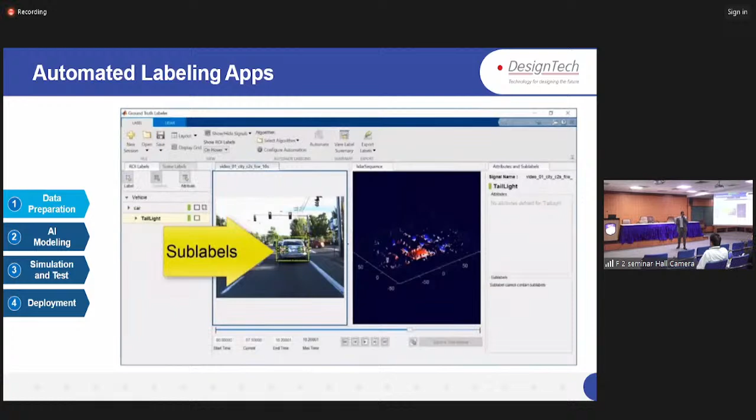So what this tool will do is allow me to define in the first few images, the first few frames, and then later on it will be done automatically by itself. It will automatically label. Here you see lidar sensor data, in which we can identify where a complete car is and what it is sensing around. In this first image, a car has been identified, so we can define it by automated labeling.

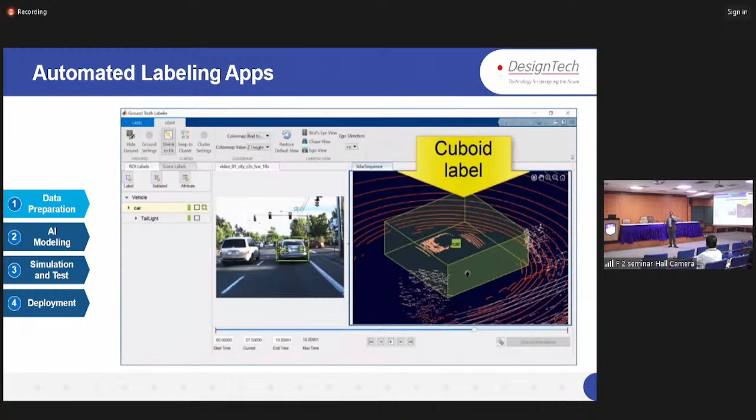Or when we talk about AI algorithms, we have a variety of different algorithms available. Pre-built algorithms are available, which we can use to define or train a specific model. It could be from machine learning, it could be from deep learning. Some pre-built models are there, so ready models are available. You can use those models, or you can do transfer learning, or use multiple reference examples which have been used by industry.

Or what we could do, we can import and export other networks from different vendors, because we support ONNX, Open Neural Network Exchange. So it will allow us to import all those networks, like PyTorch, Keras, or MXNet. These kinds of networks are available, which we can easily import.

Or what we could do, we can simply design our network from scratch. This deep network designer allows you to define a complete model within this app, and then later on identify if there are errors or warnings, and we can train our data.

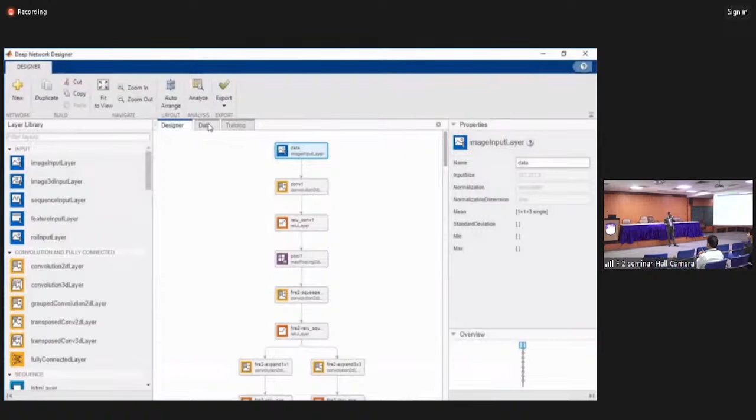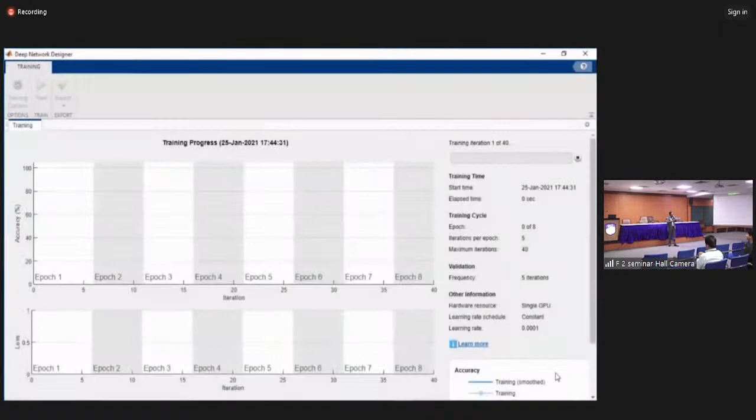So all those options are available after training. Like here, data segmentation is happening, so everything we can do within a click-kind of form. We don't need to write code for that. A complete training of a model is happening on a single GPU, and when we get that result, we can use that model for further usage.

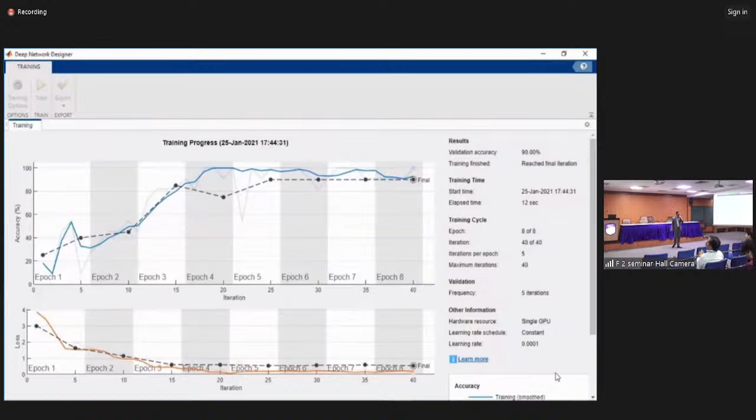Then simulation and test will come into picture. In simulation and test, you are able to see in this model what different blocks are available, like 3D scenarios, vision detector, vehicle dynamics, and sensor fusion. So a complete autonomous vehicle system has been shown on this particular model.

So what we have is a vision detector. On this vision detector, what we need to do is implement it on some kind of hardware so that it can easily detect surrounding things.

We can interface this model with third-party tools also, like this Unreal Engine kind of interface, where you see that a car is moving, and in these two frames it is finding out whether I am in a lane or not, whether some kind of vehicles are in front of me or not. Accordingly, it will apply brake or increase or decrease the speed.

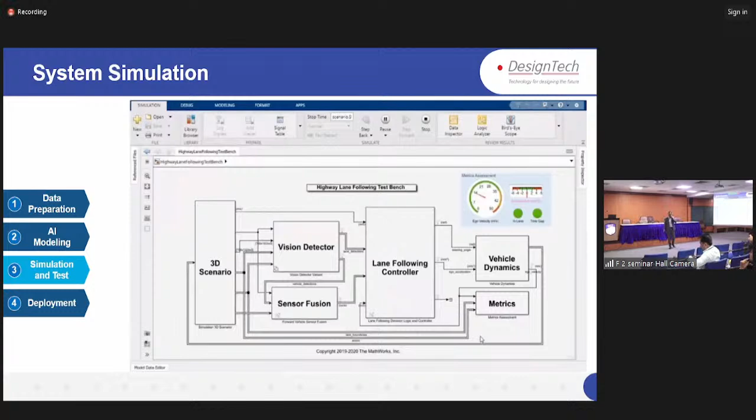Then finally comes that we need to deploy this thing. So how do we deploy? We have options available that we can deploy by using code generation on CPU, GPU, or FPGA kind of devices. So any of the devices can be used for implementation, depending on your need, depending on your project.

The same thing has been followed in this place also, that we can model and simulate our system, we can test early and often, and finally we can generate automatic code also. So a complete model-based design approach is going to be followed in this place.

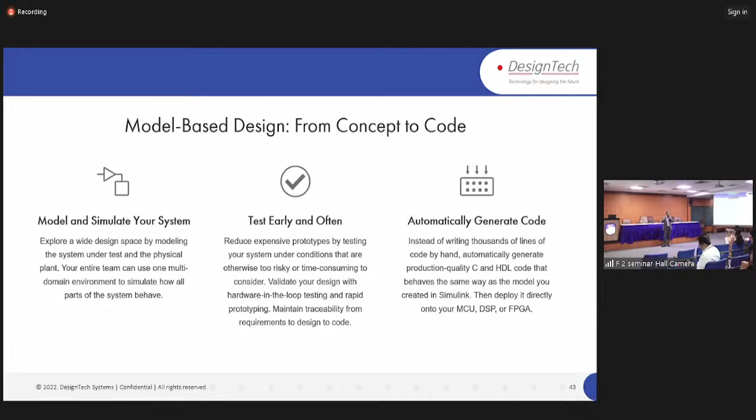Then the last thing will come up, that is system thinking in classroom. I'm going to talk in 3 points: how can system thinking be incorporated, how can students be prepared, and what if you have some questions. So first thing first, how can system thinking be incorporated.

So I'm going to talk about one of the students' projects. It's a mini drone project, a MathWorks competition of a mini drone, happening worldwide. So what students could do is submit their projects.

Students can submit their projects and get approved by MathWorks, and it can be published on the MathWorks website, as well as some cash and prize given to them. So this is the project, and I have given a link also in the presentation, or you can simply go on YouTube and find out this mini drone project itself. So I'm going to highlight a few of the points.

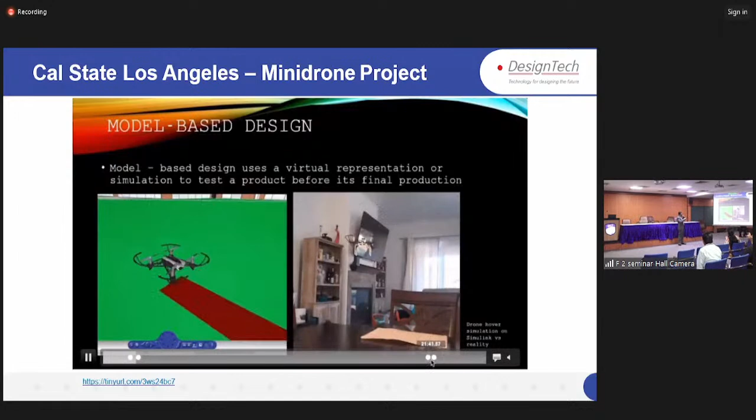So what is this project basically? This is from California State Los Angeles University, where students had developed a drone which is going to pick a Rubik's Cube. You see what they are doing: they are simulating as well as identifying whether it is working perfectly or not. So while simulating, they can check that out. This is the actual one where it is going to pick a Rubik's Cube with a claw, which is a customized kind of claw.

So why have I taken this kind of case study, or this particular student project? Because this is a very good example in which they have shown how they are going to cover technical aspects. In those technical aspects, as I said, we can cover image processing or control systems, so it can be covered.

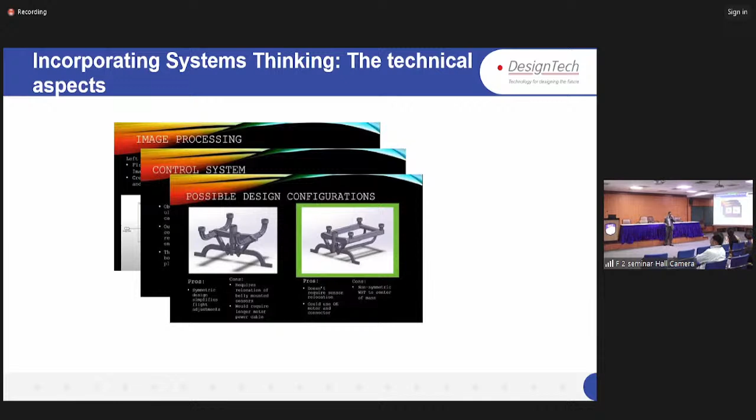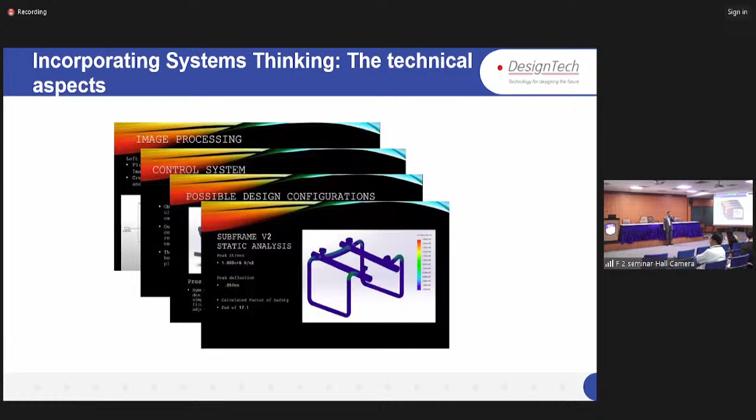Then they can find out the possible design configuration, what kind of designs we can use. So what we could do is use some other CAD design tools to design this thing, and we can import that CAD files within MATLAB to develop a complete model. And then finally, what we could do is design such kind of objects.

As I said, this project is from California State University, so Dr. Michael Thurban has chosen some of these emerging trends. Let me show you how a student can be prepared within this - for example, the MathWorks Excellence in Innovation Program.